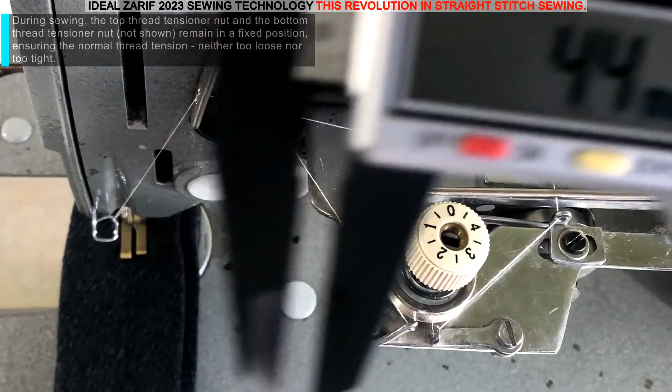During sewing, the top thread tensioner nut and the bottom thread tensioner nut, not shown, remain in a fixed position, ensuring the normal thread tension, neither too loose nor too tight.

In our Ideal Zarif 2023 year double thread chain stitch technology, the needle is not involved in pre-tightening the top thread loop from the previous stitch. As a result, for the first time ever, a double thread chain stitch sewing machine uses a needle with one long groove. This design offers greater resistance to bending compared to the double groove needle used in existing double thread and multi-thread chain stitch technologies.

Thanks to our Ideal Zarif 2023 year sewing technology, it has become possible for the first time in the world to reduce the length of the double thread chain stitch to 0.5 mm. This allows for a more secure tacking of the chain stitch seam end and prevents unraveling due to condensed stitches at a stitch length of 0.5 mm.

Streamlined design with innovative rotary looper. The world's first sewing machine with an exceptionally simple mechanical design, made possible by the incorporation of a rotary looper, 2 rotary twin-disc cam thread take-ups, a simple needle crank slider mechanism, and the absence of needle guards.

Loosely tightening the top thread loop in a stitch to produce an elastic stitch. The world's first double thread chain stitch sewing machine using our know-how can loosely tighten the top thread loop in a stitch without changing the normal thread tension. The result is an elastic stitch that makes it possible for the first time to produce exceptionally smooth seams on lightweight materials and elastic seams on stretch materials.

Advanced capabilities for sewing thick materials. This groundbreaking sewing machine can sew materials up to 8 mm thick with a short needle bar stroke of 32 mm, thanks to our know-how.

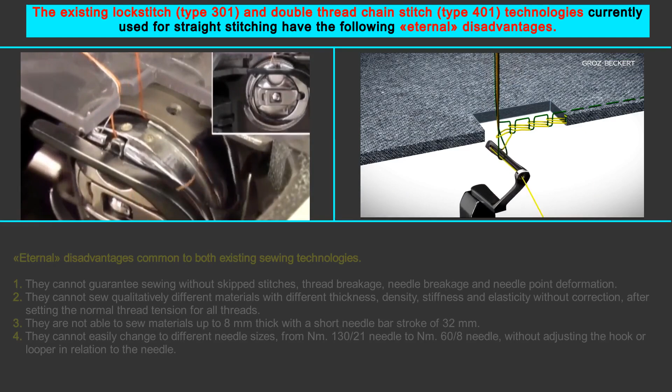The existing lockstitch, Type 301, and double thread chain stitch, Type 401, technologies currently used for straight stitching have the following eternal disadvantages common to both existing sewing technologies. They cannot guarantee sewing without skipped stitches, thread breakage, needle breakage, and needle point deformation.

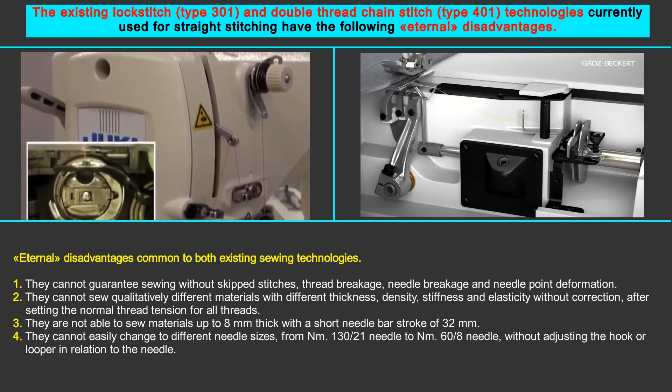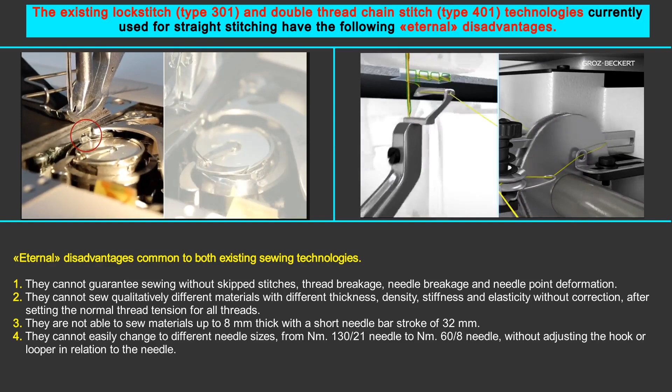They cannot sew qualitatively different materials with different thickness, density, stiffness, and elasticity without correction, after setting the normal thread tension for all threads. They are not able to sew materials up to 8 mm thick with a short needle bar stroke of 32 mm. They cannot easily change to different needle sizes, from number 130 needle to number 60 needle, without adjusting the hook or looper in relation to the needle.

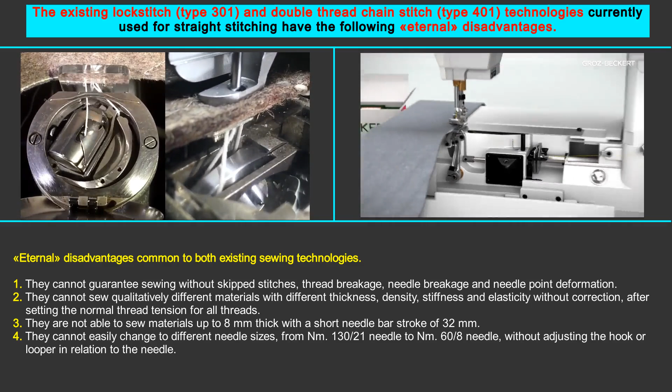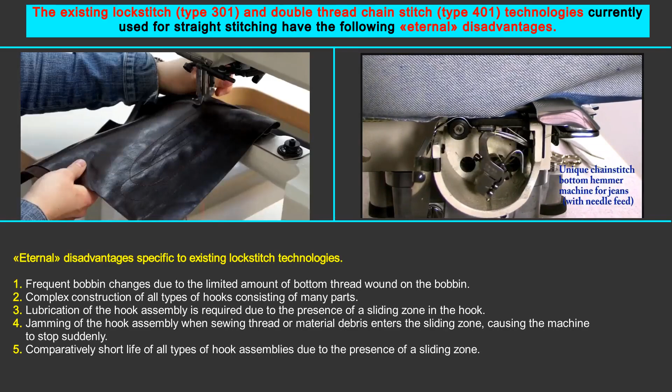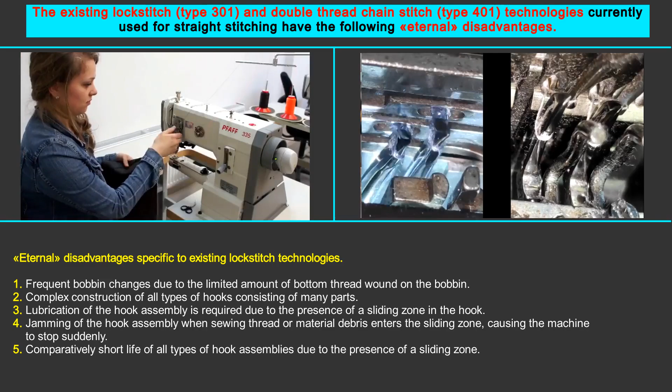Eternal disadvantages specific to existing lockstitch technologies: frequent bobbin changes due to the limited amount of bottom thread wound on the bobbin. Complex construction of all types of hooks consisting of many parts. Lubrication of the hook assembly is required due to the presence of a sliding zone in the hook. Jamming of the hook assembly when sewing thread or material debris enters the sliding zone, causing the machine to stop suddenly. Comparatively short life of all types of hook assemblies due to the presence of a sliding zone.

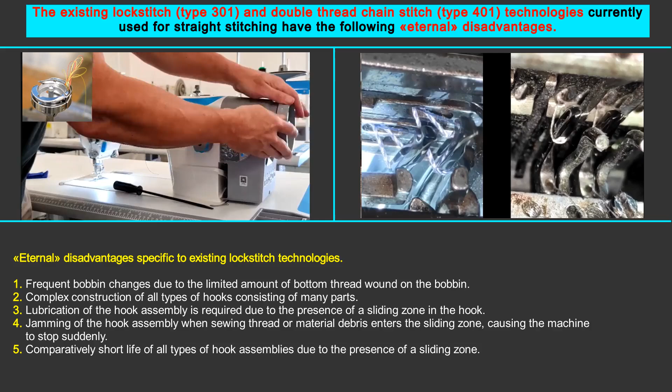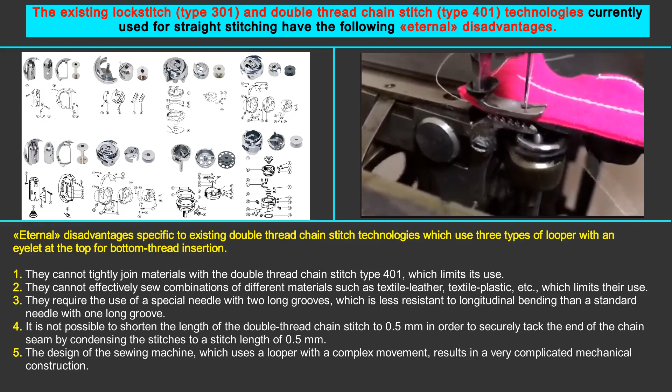Eternal disadvantages specific to existing double thread chain stitch technologies, which use 3 types of looper with an eyelet at the top for bottom thread insertion. They cannot tightly join materials with the double thread chain stitch type 401, which limits its use. They cannot effectively sew combinations of different materials such as textile leather, textile plastic, etc., which limits their use. They require the use of a special needle with 2 long grooves, which is less resistant to longitudinal bending than a standard needle with 1 long groove.

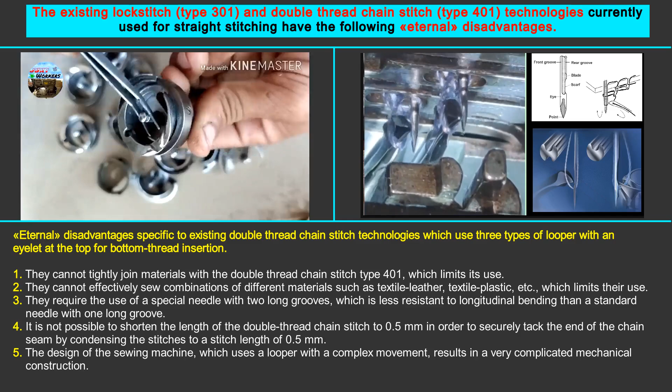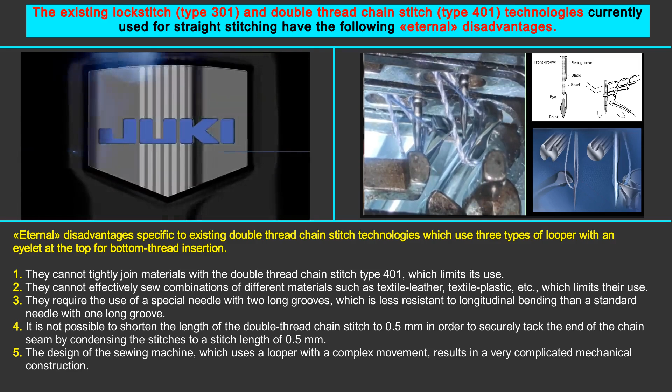It is not possible to shorten the length of the double thread chain stitch to 0.5 mm in order to securely tack the end of the chain seam by condensing the stitches to a stitch length of 0.5 mm. The design of the sewing machine, which uses a looper with a complex movement, results in a very complicated mechanical construction.

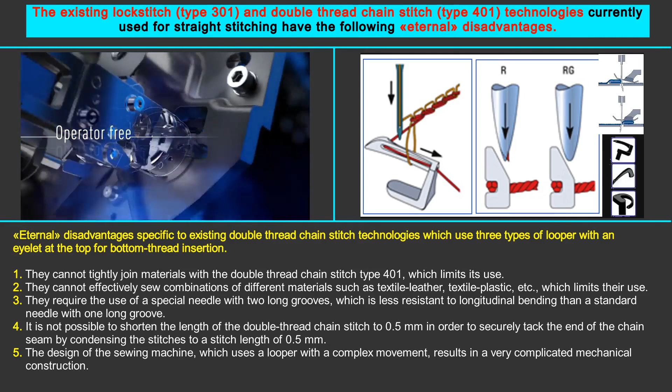Our ideal Zarif 2023 year double thread chain stitch technology has revolutionized sewing machine design and straight stitch sewing. For the first time, a rotary looper is used to form a double thread chain stitch, resulting in the world's first new double thread chain stitch type 401, where the top and bottom thread loops are rotated 180 degrees.

For the first time, an ordinary needle with a single long groove is used to form a double thread chain stitch, as the needle does not participate in the pre-tightening of the top thread loop placed in the previous stitch. For the first time, materials up to 8 mm thick can be sewn with a needle bar stroke of 32 mm. For the first time it is possible to sew materials of different thickness, density, stiffness, and elasticity without any adjustments by setting the normal tension for all threads.

For the first time it is possible to sew without skipped stitches, thread breakage, needle breakage, and needle point deformation, provided the thread is free of knots and the needle size matches the material being sewn.

For the first time, using our know-how, it is possible to tightly pull the top thread loop in a stitch to achieve a dense material join, or to loosely pull the top thread loop in a stitch to get smooth seams on light materials and elastic seams in stretchable materials without adjusting normal thread tension.

For the first time, the maximum allowable gap between the needle and the tip of the looper has been increased to 0.5 mm, allowing an easy transition from a number 130 needle to a number 60 needle without adjusting the looper relative to the needle.

For the first time, high stitch formation reliability has been achieved without the use of needle guards.

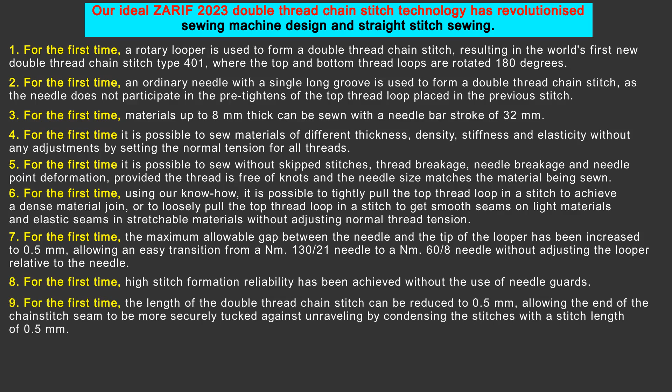For the first time, the length of the double thread chain stitch can be reduced to 0.5 mm, allowing the end of the chain stitch seam to be more securely tucked against unraveling by condensing the stitches with a stitch length of 0.5 mm.

For the first time, it is possible to develop different types of sewing machines, with different types of platforms and different types of material feed, with a very simple mechanical design that operates with high reliability and long service life.

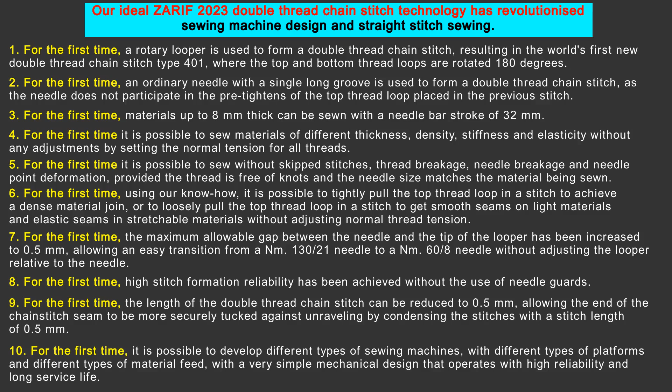History of Zarif double thread chain stitch technology with rotary looper. In 1994 we came up with the idea of creating a double thread chain stitch type 401 using a rotary looper. We applied for a patent for this new Zarif double thread chain stitch technology, and in 2000 US patent number 6095069 was granted.

Before our invention, the rotary looper was used in the single thread chain stitch technology, type 101, on single-thread chain stitch sewing machines and button machines.

History records that the rotary looper was invented in 1857 by the American inventor James Edward Allen Gibbs for his single-thread chain stitch sewing machine, based on the single-thread chain stitch technology, Type 101, where the rotary looper makes 1 revolution per needle cycle. See US patent number 17427.

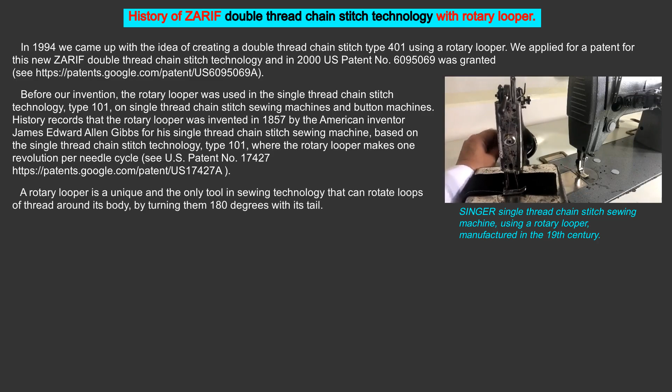A rotary looper is a unique and the only tool in sewing technology that can rotate loops of thread around its body by turning them 180 degrees with its tail.

As is known, the rotary looper is made in one piece and has 3 zones: the head zone with a front tip to catch the thread and a rear tip to release the thread loop from the body of the looper, the tail zone for rotating the thread loop through 180 degrees, and the shaft zone for attaching the looper to the machine.

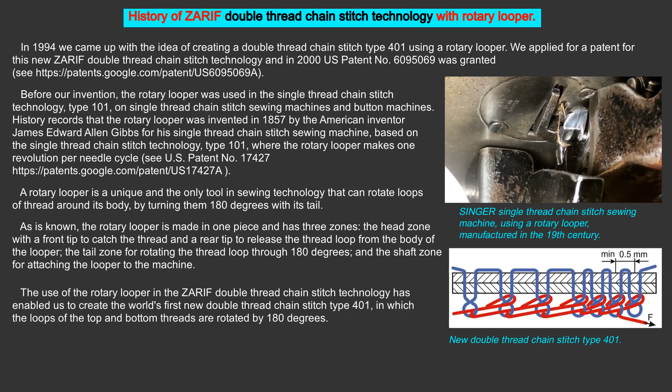The use of the rotary looper in the Zarif double thread chain stitch technology has enabled us to create the world's first new double thread chain stitch type 401, in which the loops of the top and bottom threads are rotated by 180 degrees. The Zarif double thread chain stitch technology forms a double thread chain stitch type 401, where the rotary looper makes 2 revolutions per needle cycle.

Zarif double thread chain stitch technology with rotary looper, invented by us in 1994, see US patent number 6095069.

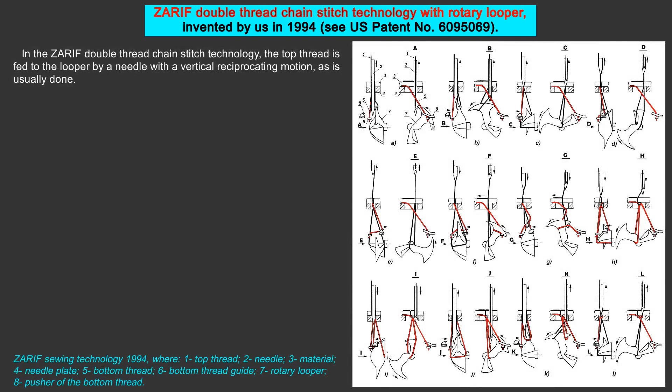In the Zarif double thread chain stitch technology, the top thread is fed to the looper by a needle with a vertical reciprocating motion, as is usually done. To feed the bottom thread to the looper, a bottom thread pusher is used, which makes oscillating movements in the horizontal plane.

Since the rotary looper can loop thread around its body in the form of a loop, once the bottom thread, fed by the bottom thread pusher, is caught by the front tip of the looper, the top thread loop leaves the looper body and, as it tightens, forms a loop from the bottom thread which the looper can now wrap around its body. As the rotary looper only uses a small length of the thread loops and the thread loops are released from the rear tip of the looper, the thread loops can be tightened very smoothly.

Therefore, the Zarif double thread chain stitch technology uses 2 rotary twin disc cam thread take-ups to feed and tighten both the top and bottom threads, with each thread being controlled separately.

History of the prototype development of the Zarif sewing machine based on Zarif double thread chain stitch technology with a rotary looper. In 1997, we decided to build a prototype sewing machine to test our new Zarif double thread chain stitch technology with a rotary looper, which we had invented in 1994.

We chose a Class 1022 lockstitch industrial sewing machine from the Belarusian company Orsha because it was widely used in Uzbekistan at the time and was relatively affordable. The machine had a needle bar stroke of 32 mm and was designed to sew fabrics of medium thickness.

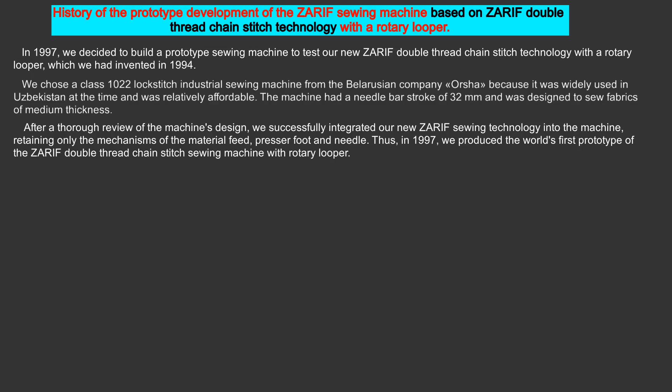After a thorough review of the machine's design, we successfully integrated our new Zarif sewing technology into the machine, retaining only the mechanisms of the material feed, presser foot, and needle. Thus, in 1997, we produced the world's first prototype of the Zarif double thread chain stitch sewing machine with rotary looper.

Trials on a prototype Zarif sewing machine allowed us to identify some of the shortcomings of our new Zarif double thread chain stitch technology developed in 1994. We then set ourselves the goal of improving our new Zarif sewing technology until it became the world's first ideal technology for straight stitch sewing.

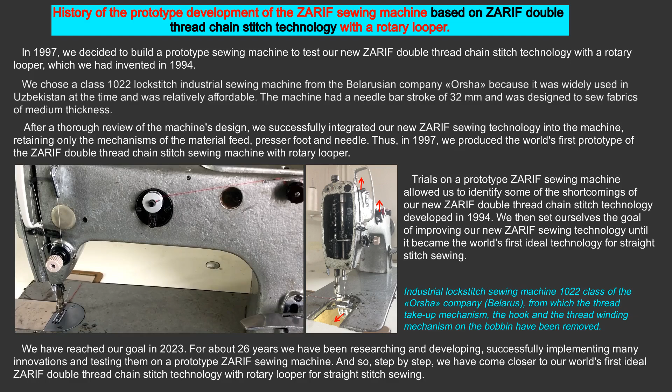We have reached our goal in 2023. For about 26 years we have been researching and developing, successfully implementing many innovations and testing them on a prototype Zarif sewing machine. Step by step, we have come closer to our world's first ideal Zarif double thread chain stitch technology with rotary looper for straight stitch sewing.

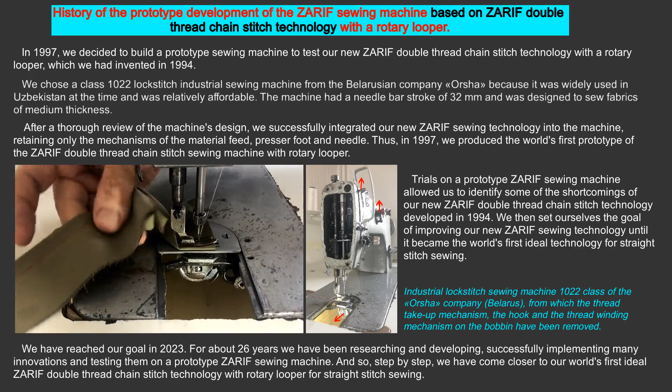Stitch type, working units, and technical specifications of the prototype Zarif sewing machine based on the ideal Zarif 2023 year double thread chain stitch technology with rotary looper.

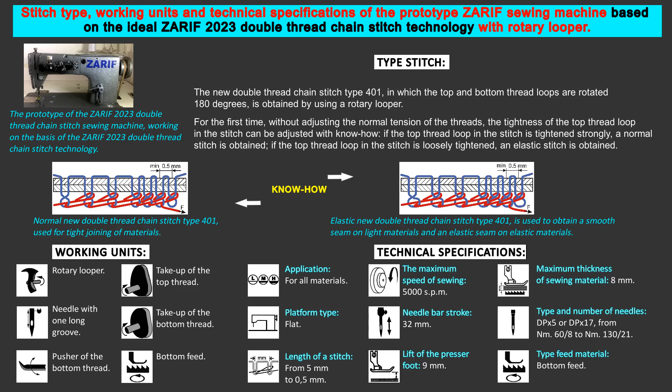The world's first prototype of the Zarif 2023 year double thread chain stitch sewing machine has an extremely simple mechanical design and forms stitches with high reliability and durability.

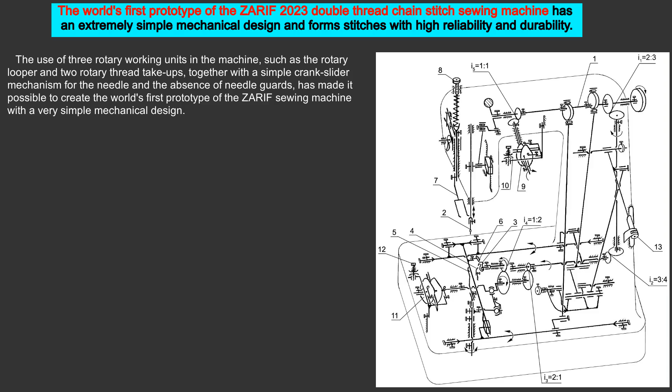The use of 3 rotary working units in the machine, such as the rotary looper and 2 rotary thread take-ups, together with a simple crank slider mechanism for the needle and the absence of needle guards, has made it possible to create the world's first prototype of the Zarif sewing machine with a very simple mechanical design.

In addition, the machine is the first in the world to allow easy switching between different needle sizes, from needle number 130 to needle number 60, without having to adjust the position of the looper relative to the needle, thanks to the world's first increase of the maximum allowable gap between the needle and the looper tip to 0.5 mm.

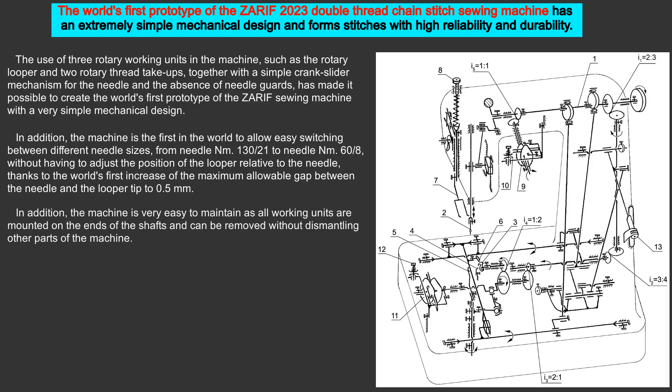In addition, the machine is very easy to maintain as all working units are mounted on the ends of the shafts and can be removed without dismantling other parts of the machine.

Kinematic diagram of the prototype Zarif 2023 year double thread chain stitch sewing machine.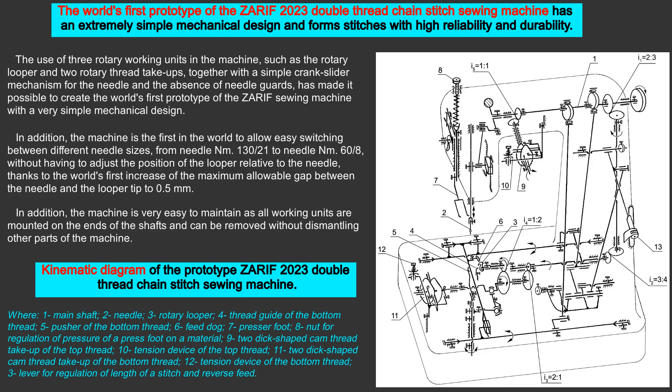Our automatic thread trimming technology for the Zarif double thread chain stitch technology with rotary looper. It is well known that most modern industrial sewing machines are equipped with automatic thread trimming, and all automated sewing systems require automatic thread trimming.

With this in mind, we have long been researching and developing automatic thread trimming technology for our Zarif double thread chain stitch technology with rotary looper. Thanks to these efforts, we successfully invented the automatic thread trimming technology for our Zarif double thread chain stitch technology with rotary looper in 2020, and further improved it in 2021 and 2023.

The advanced version of our automatic thread trimming technology, which we invented in 2023, has not yet been physically manufactured to ensure its practical functionality. However, the drawings of our automatic thread trimming technology prove that it works in theory. At present, we cannot disclose the details of our automatic thread trimming technology as it is not yet patented.

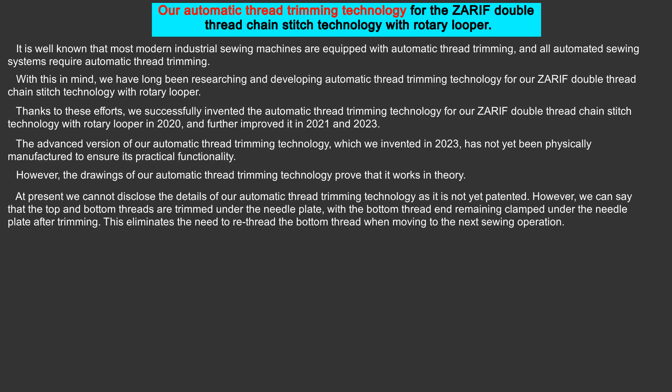However, we can say that the top and bottom threads are trimmed under the needle plate, with the bottom thread end remaining clamped under the needle plate after trimming. This eliminates the need to rethread the bottom thread when moving to the next sewing operation.

If the sewing process is finished with condensed stitches of 0.5 mm stitch length and manual thread trimming, the resulting chain stitch seam will be difficult to unravel from the end of the seam.

If the sewing process is finished with condensation stitches at a stitch length of 0.5 mm and with automatic thread trimming, the resulting chain stitch seam cannot be unraveled from the end of the seam, as the end of the top thread passes through the last loop of the bottom thread.

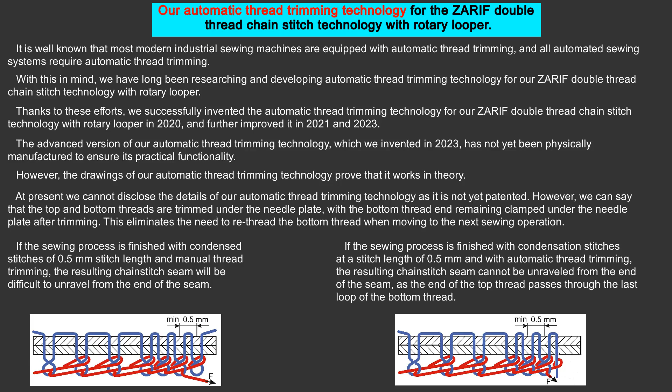Our ideal Zarif 2023 year double thread chain stitch technology with rotary looper opens a new era in the development of automated straight stitch sewing. It is well known that the future of mass production in various sewing industries is closely linked to automation, and the automation of sewing processes plays an important role in this transformation.

Currently, some sewing operations are already being automated using robotic manipulator-controlled sewing systems. In the future, these robotic manipulators may be replaced by more advanced humanoid robots.

When it comes to automated sewing, it is essential that the process is performed to a high standard, ensuring that there are no skipped stitches, thread breakage, needle breakage and deformation of the needle point. Efficient sewing of different materials without the need for adjustments is also critical to the automation of the sewing process.

Our ideal Zarif 2023 year double thread chain stitch technology with rotary looper for straight stitch sewing is the perfect solution to meet all these requirements. Our prototype Zarif sewing machine has proven this in practice, but only when the material is fed in one direction. This allows us to create different automatic sewing systems based on this technology, where the material is fed in a single direction. However, there are many sewing operations where the stitch must follow a complex path.

In such cases, stitch formation must be independent of the material feed direction. With this in mind, we have been working for a long time to develop a device that would allow our Zarif double thread chain stitch technology with rotary looper to produce stitches regardless of the direction of material feed.

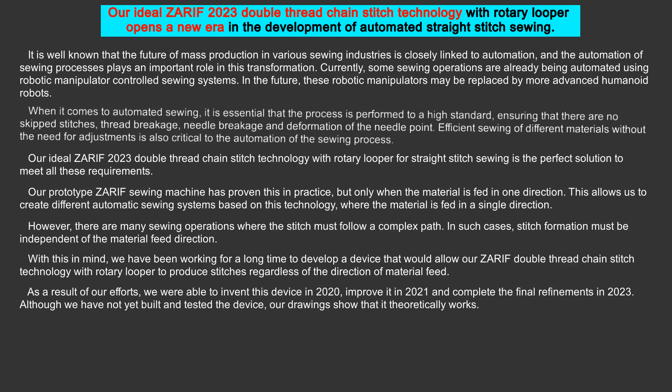As a result of our efforts, we were able to invent this device in 2020, improve it in 2021, and complete the final refinements in 2023. Although we have not yet built and tested the device, our drawings show that it theoretically works.

Patent protection for our inventions that we invented in 2023. We intend to secure patents in several countries around the world for all our inventions developed in 2023, including the ideal Zarif double thread chain stitch technology with rotary looper, automatic thread trimming technology, and the device that allows stitch formation with material feed in any direction.

Advantages and disadvantages of lockstitch type 301 and double thread chain stitch type 401.

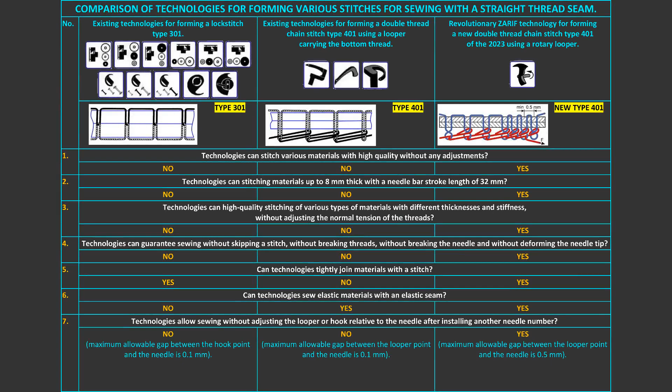Comparison of technologies for forming various stitches for sewing with a straight seam.

Application of the revolutionary ideal Zarif 2023 year double thread chain stitch technology with a rotary looper that forms stitches in only one direction. Our prototype Zarif sewing machine, based on this technology, has proven its ability to perform straight stitching with material feed in only one direction and a stitch length ranging from 0.5 mm to 5 mm.

In addition, we have developed a technical solution that allows the stitch length to be increased to 10 mm. Based on our ideal Zarif 2023 year double thread chain stitch technology, which forms stitches in only one direction, the following machines can be designed and manufactured.

Various industrial sewing machines with different types of platforms and material feed mechanisms. Various automated sewing systems with material feed in one direction only. A range of programmable automatic pattern sewing machines with a 360 degree rotating head that can feed material in any direction to create complex stitch patterns.

Application of the revolutionary ideal Zarif 2023 year double thread chain stitch technology with a rotary looper, forming stitches in any direction. If the device we invented in 2023, which enables this technology to form stitches with material feed in any direction, works successfully in practice, the following automated machines can be designed and manufactured on the basis of it, enabling the production of complex stitch patterns.

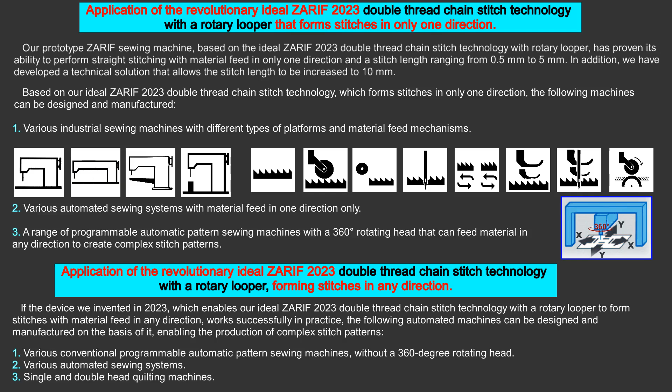Can our revolutionary ideal Zarif 2023 year double thread chain stitch technology with a rotary looper become obsolete in the future? We are confident that this will not happen. Our confidence is based on the following undeniable facts.

The eternal disadvantages of the existing sewing technologies currently used for straight stitch sewing, such as the lockstitch type 301 and the double thread chain stitch type 401, prevent them from becoming the ideal solution for straight stitch sewing, no matter how much they evolve in the future.

Furthermore, the invention of an ideal straight stitch sewing technology can only be achieved by creating a new double thread chain stitch technology that eliminates the eternal disadvantages of existing sewing technologies, since it is technically impossible to invent an ideal straight stitch sewing technology by developing a new lockstitch technology without using a hook.

However, the task of inventing a new double thread chain stitch technology and making it the ideal solution for straight stitch sewing is a very challenging one. All previous attempts were unsuccessful. For example, the new double thread chain stitch technology using a special hook, see US patent number 3811392, 1974, was never commercialized.

We believe that any new double thread chain stitch technology using a special hook cannot become an ideal solution for sewing due to the complexity of the special hook design and the need for lubrication.

We were the first in the world to invent the new Zarif double thread chain stitch technology with rotary looper in 1994, which was granted US patent number 6095069 in 2000. It took us about 26 years to make this new Zarif sewing technology the world's first ideal straight stitch sewing technology.